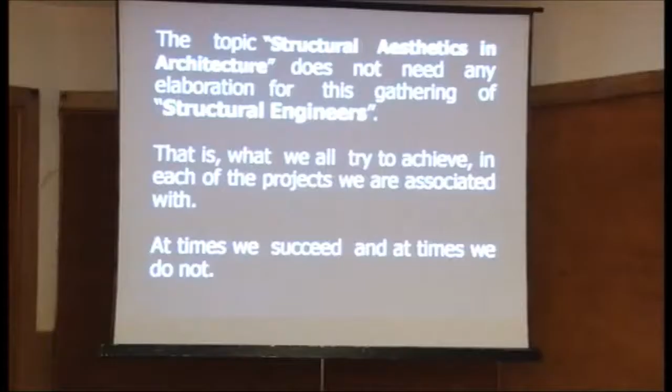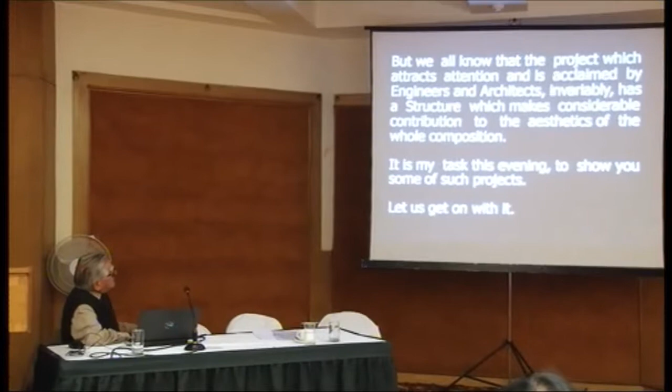The topic structural aesthetics in architecture does not need any elaboration for this gathering of structural engineers. That is what we all try to achieve in each of the projects we are associated with. At times we succeed, and at times we do not. But we all know that the project which attracts attention and acclaim by engineers and architects invariably has a structure which makes considerable contribution to the aesthetics of the whole composition.

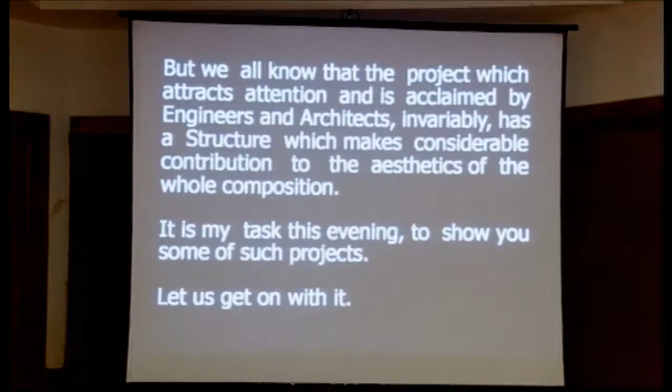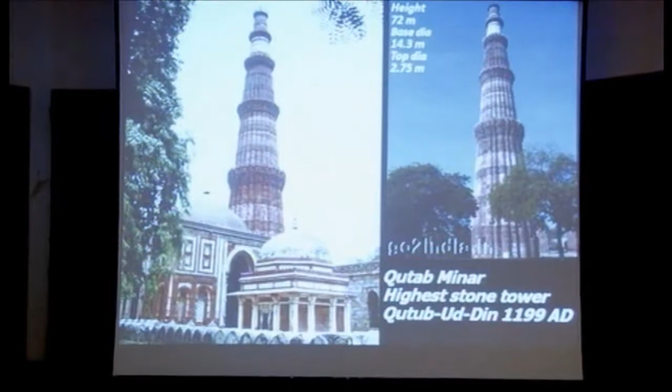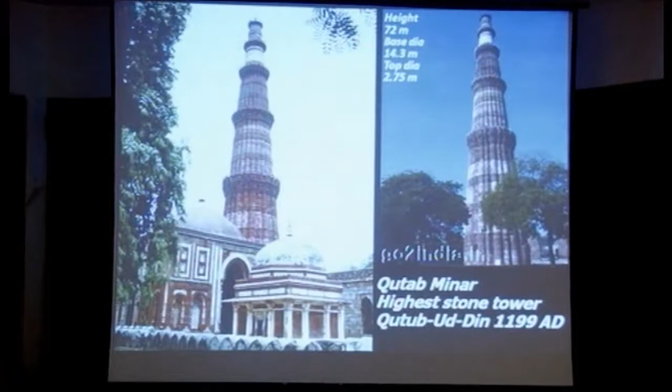Friends, it is my task this evening to show you some of such projects. So you all recognize these buildings, you've seen them all the time - what gives them their aesthetics? It's the structure which gives them their aesthetics. Qutab Minar is the structure which makes it so beautiful. Eiffel Tower is the structure which makes it outstanding, a symbol of France, if not Paris, and it's known all over who designed it, who built it - engineers.

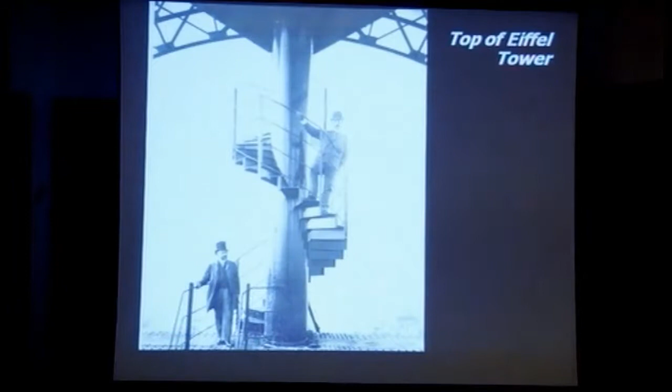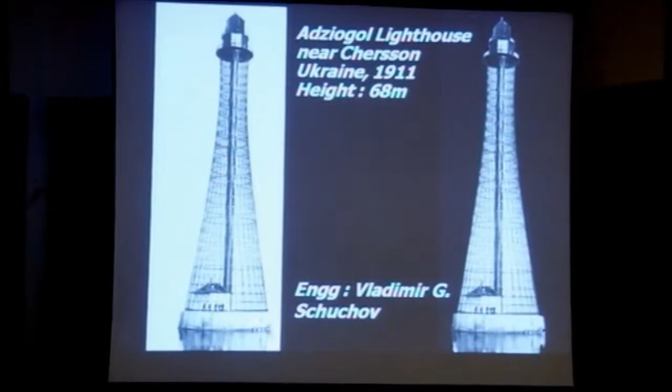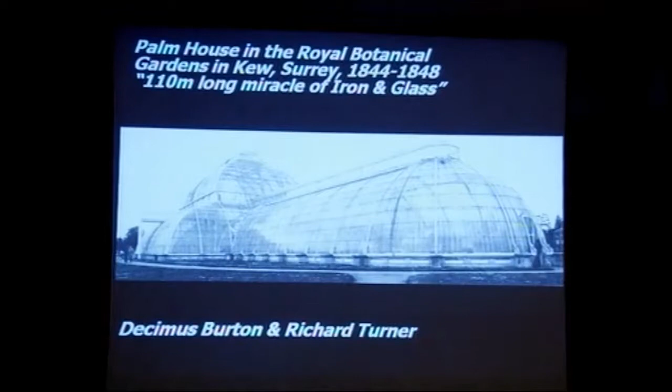These are the two gentlemen standing at the top, way back when no computers were there, no analysis was there, nobody knew so much about the properties, but look at these. This is another engineer who did it in Ukraine in 1911. These are very old buildings designed by engineers - this is the Royal Botanic Palm House Gardens in Kew, 1844-1848, 110 meters long, a miracle of iron and glass, it says. All done by engineers, with beautiful structures inside.

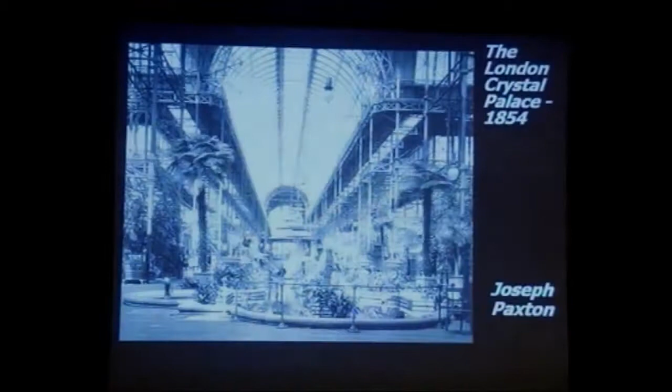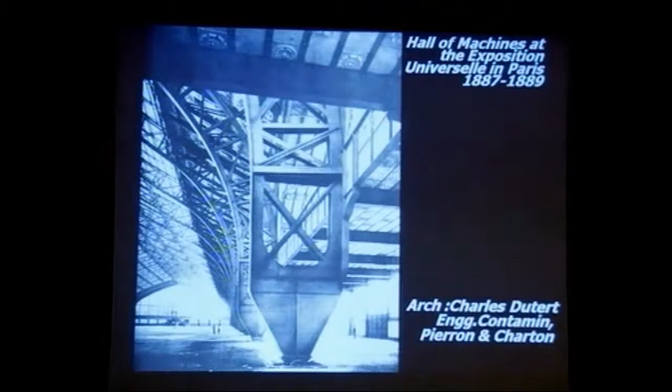Well, so I just wanted to set the mood. Now we will come to what my colleagues have sent me.

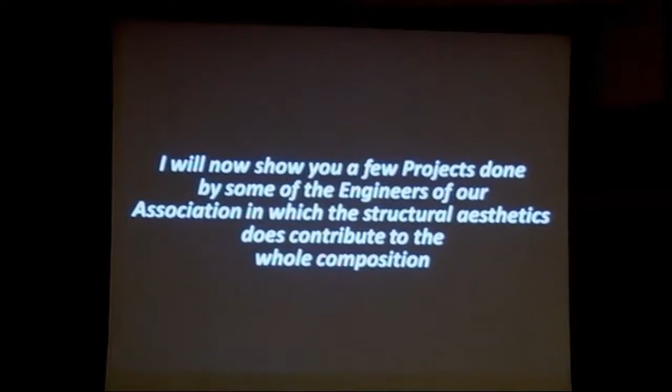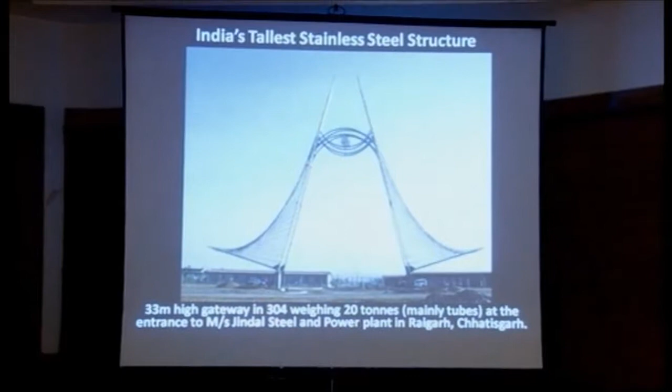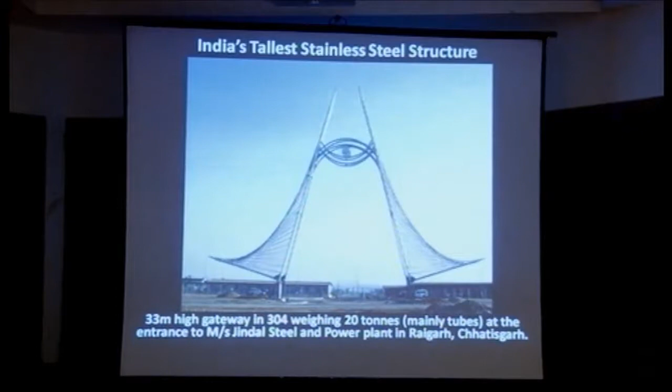I will like to start with the only lady member in this audience, amongst our association - her project. Look at this structure. This is the eye looking at all of you, trying to see what is inside your mind. This is a gateway structure, all in stainless steel. Isn't it beautiful? And the beauty is that it's all made of straight pipes - the curve you see is actually an illusion. These are some other views. She has stated something, but this is a beautiful structure. I thought it would be a nice befitting beginning.

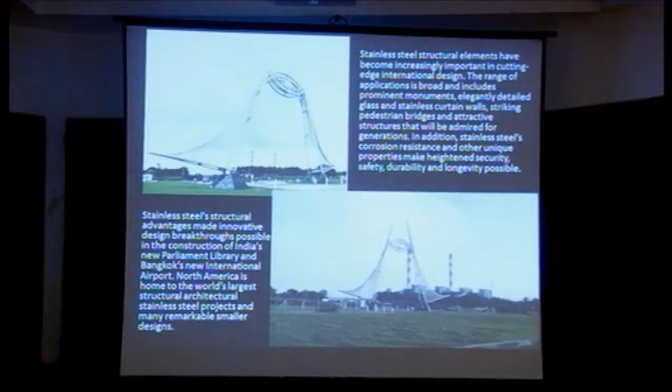And then we come to our president. I think he has made a presentation already, all of which you must have seen. It is in Calcutta, the terminal building. It has such a daring structure - 81 to 90 meter span trusses and 27 to 18 meter cantilevers on either side.

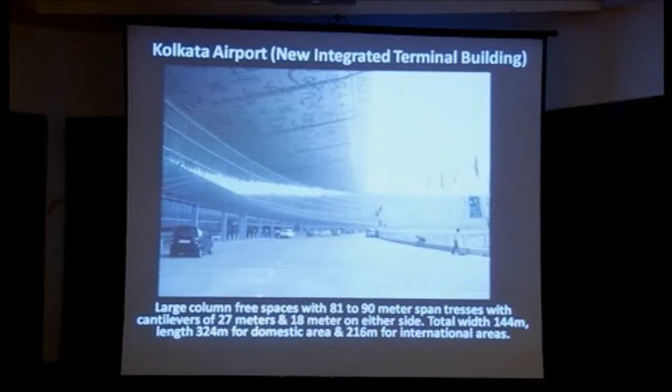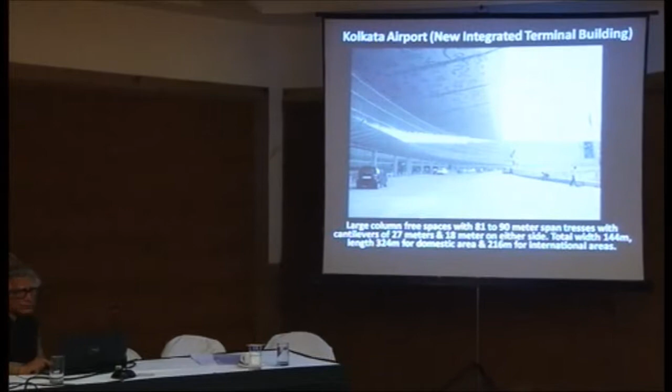And the total building is 144 meters by 550 meters - it's a huge building, and he has done it very successfully. It's a very bold structure. This is the interior of it, and you can see a cross section. It has two basements, but the truss has huge cantilevers.

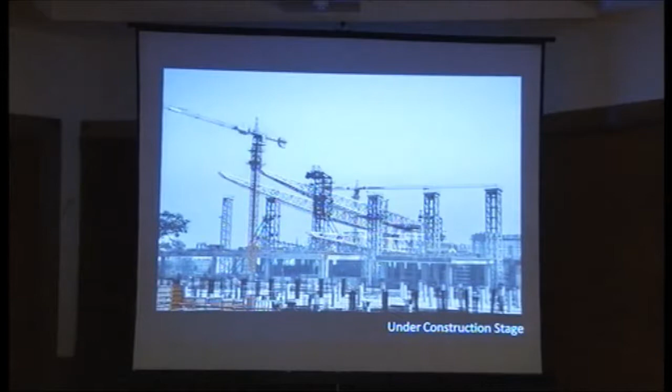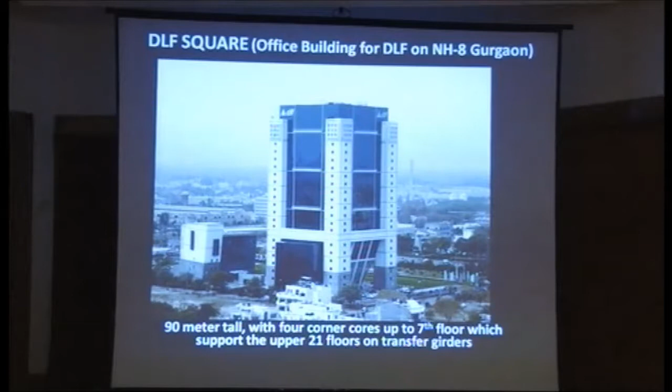And this is some of the construction slides - the construction itself was a task by itself, but it was carried out very successfully. And this is another building you have all seen, but perhaps you didn't know that the lower band is transfer girders, and it carries all the upper floors. And these four hollow cores carry the entire building. It's quite an interesting structure.

And this is another beautiful building which he has done in Amritsar. It has 3 basements and 8 floors, and a whole lot of bridges connecting 3-4 floors, 30 meter span bridges. And there is a banquet hall inside which has transfer girders to carry the upper 6 floors, and all the PT slabs and whatnot.

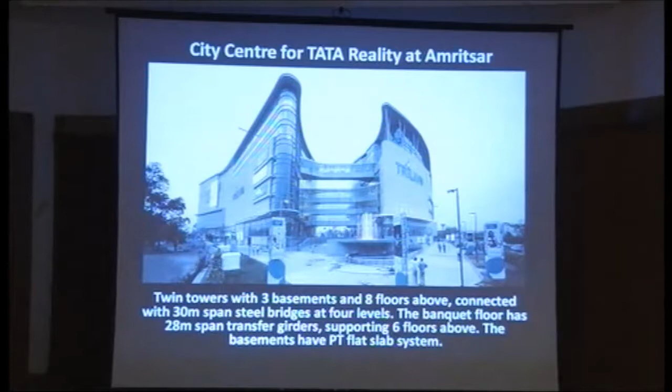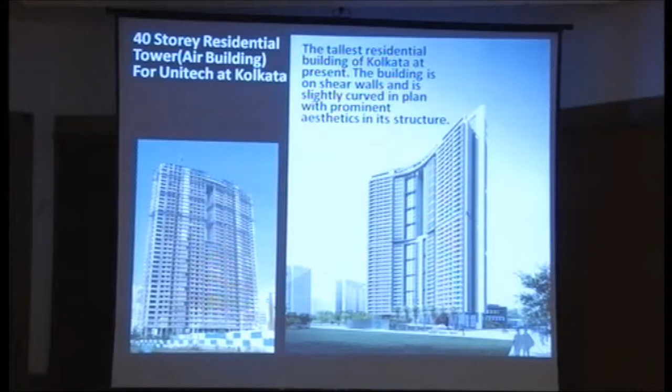And this is the first tall building in Calcutta - 40 stories, a residential building. So far it is the tallest. It's a beautiful structure which I think for many years will stay the tallest, because it's quite surprising that in Calcutta they went vertically so much.

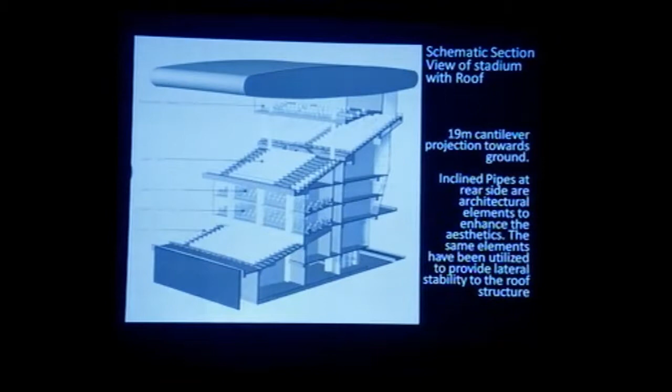Now I'll quickly show you the various members' structures. You see, this is Eden Gardens Stadium - that is a cross section. I don't think I have to give all the details, perhaps real images are enough. Do you all agree? Yes. So it's a large cantilever with 2 or 3 tiers.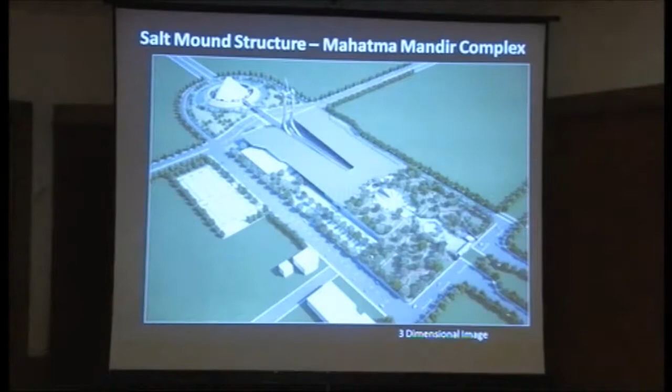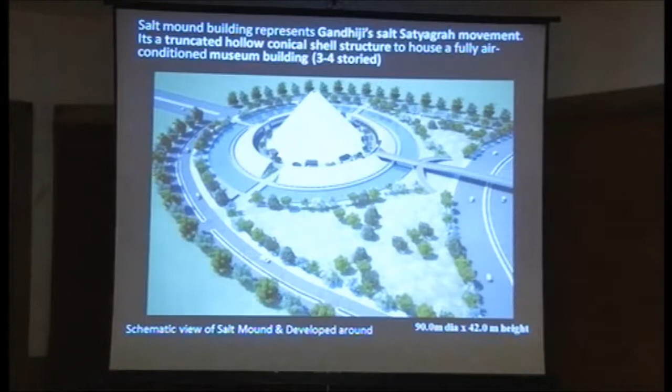To commemorate Mahatma Gandhi's Salt Satyagraha, they thought of this conical structure which houses a museum inside. The dimensions are given there - 90 meter span and 42 meter height. It is in concrete, shown during construction. It's quite interesting.

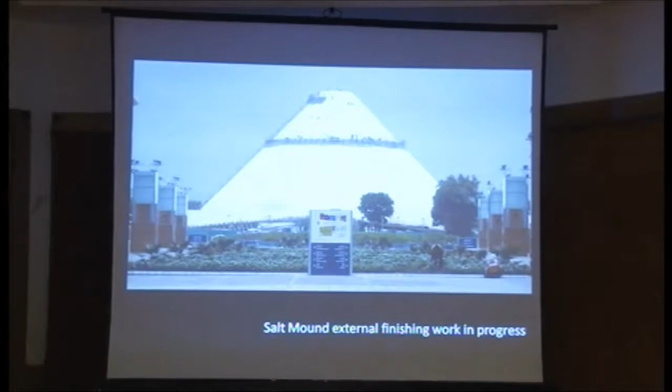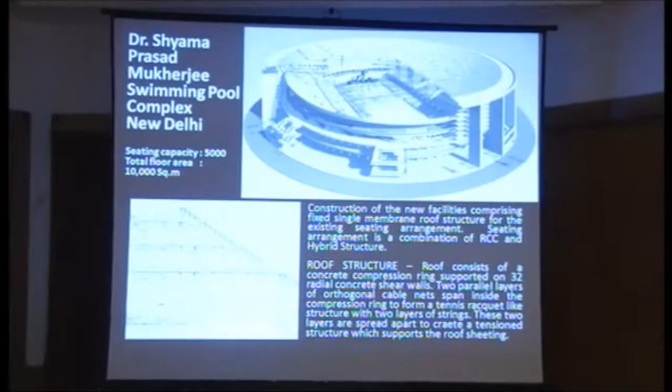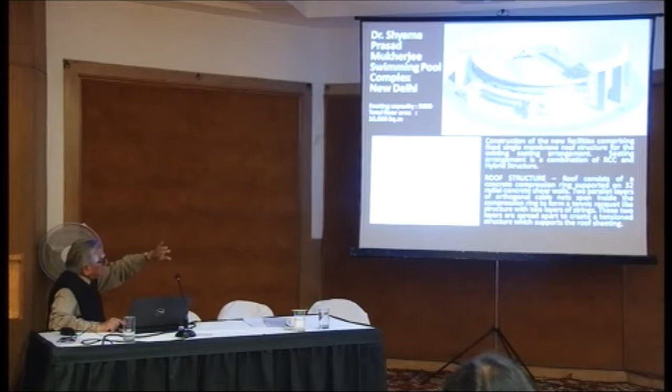Now this is the Shyama Prasad Mukherjee swimming complex. The swimming pool was already there, but they had to cover it, and they covered it in a very ingenious manner - they had shear walls all around, and a ring which supported two meshes, creating a tension structure, with the ring as a compression member. It's a beautiful structure.

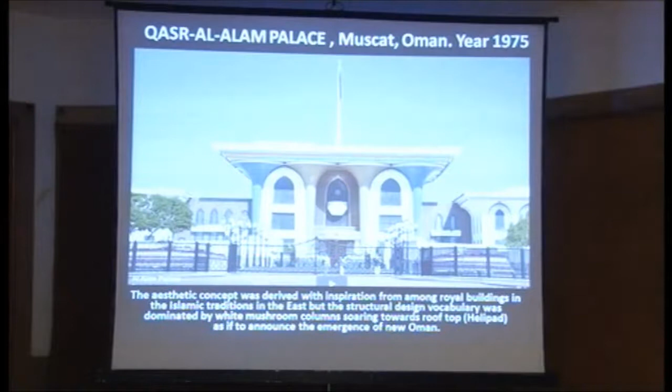Then Mahesh—I'm glad you've come finally, Mahesh. Yes, I've been outside keeping other people company. But you haven't brought Ranjana along, I was expecting her also to come.

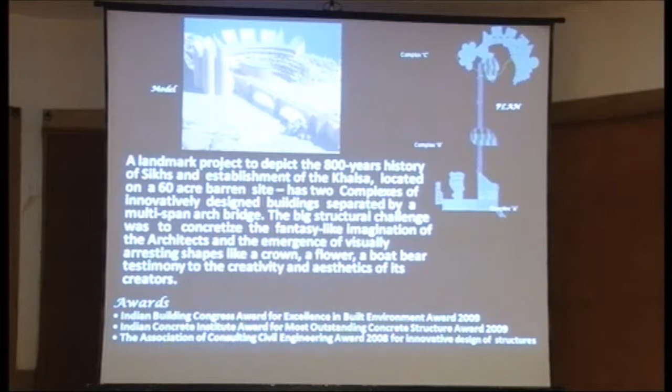Now the next slide gives the description. That side is the plan. There are two units and a bridge connecting them.

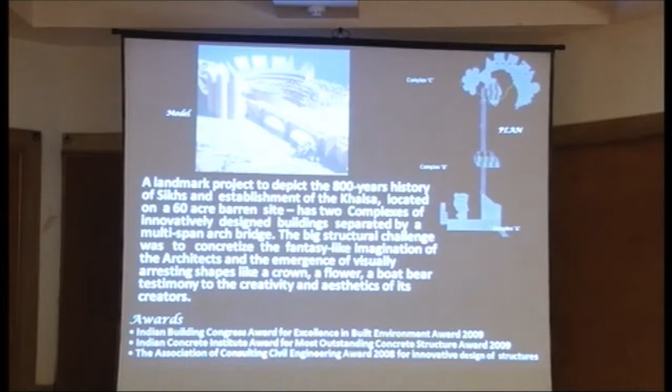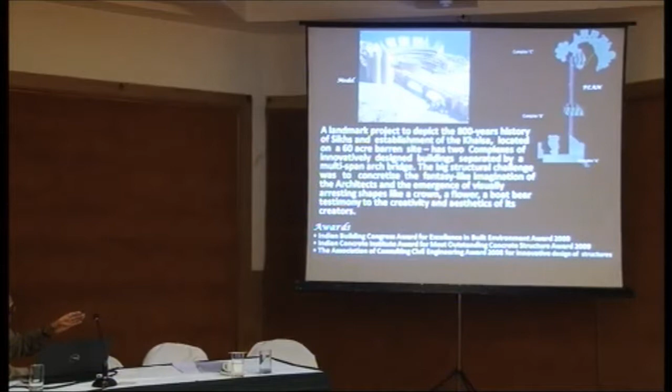It's interesting to read this, so I'll read it quickly. A landmark project depicting the 800-year history of Sikhs and the establishment of the Khalsa, located on a 60-acre barren site, with two complexes of innovatively designed buildings separated by a multi-span arch bridge. You could see all that. The big structural challenge was to concretize the fantasy-like imagination of arresting shapes—a crown, a flower, a boat—testimony to the creativity and aesthetics of the creators. It has won so many awards: Indian Building Congress, Indian Concrete Institute, and Association of Consulting Civil Engineers.

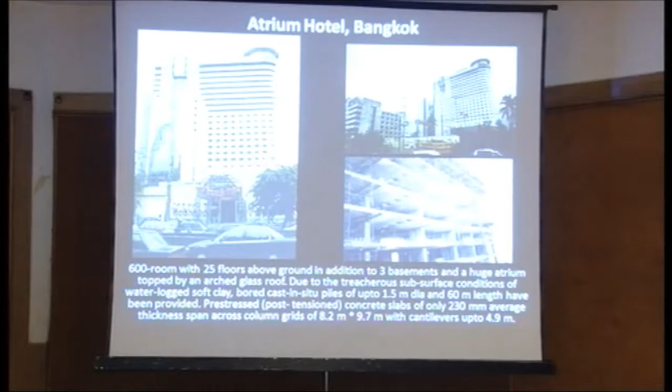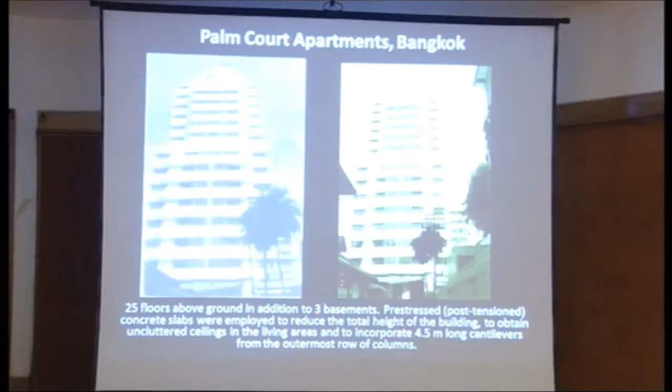He has also done these multi-story buildings in Bangkok, beautiful buildings with these slabs and large diameter piles, 60-meter long piles. These are very challenging structures, and the structural contribution is what makes these buildings possible—you can see how the structure plays such an important part.

Now this is from Shirish Patel, that's Dr. Nori, who has sent this. Anybody who goes to Bombay doesn't miss this building—the Kanchanjunga Apartments, 1974. I was told that from India there was an international exhibition of concrete structures, and they selected two buildings from India. This was one, and the other was the Hall of Nations, which I'll show you later.

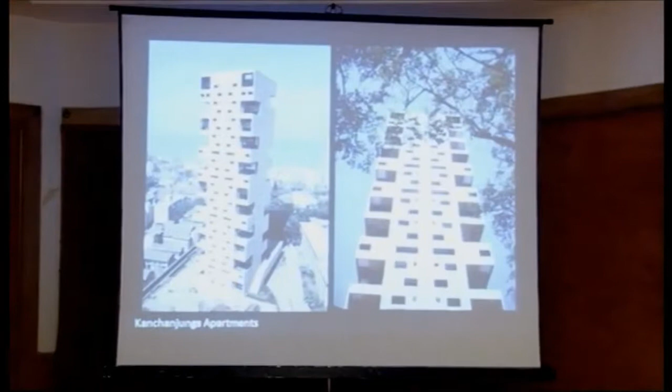This is a building from '74 with shear walls, and it's beautiful—you don't have to read it. It's all built around a central core; photographs show the core was slip-formed, and the building came up later. These are other views—a beautiful building.

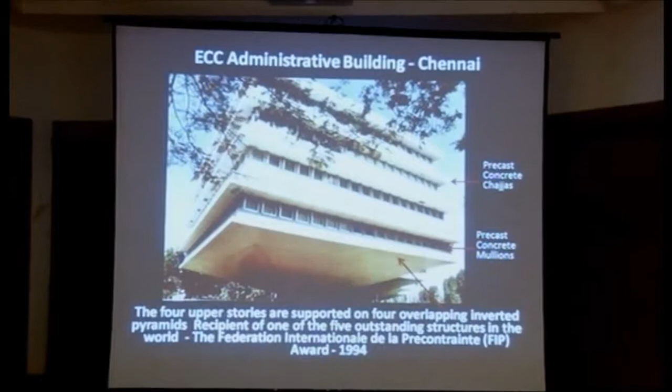This is another award-winning building by Shirish's office, Dr. Nori. The entire structure is built on a core—a lift core, where the bottom is a post-tension slab and the top wall is supported on this. It's beautiful.

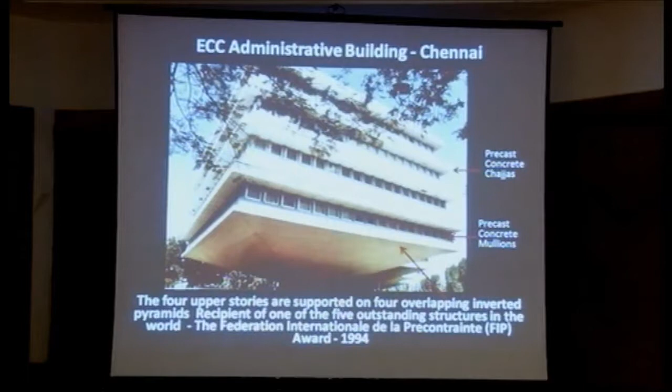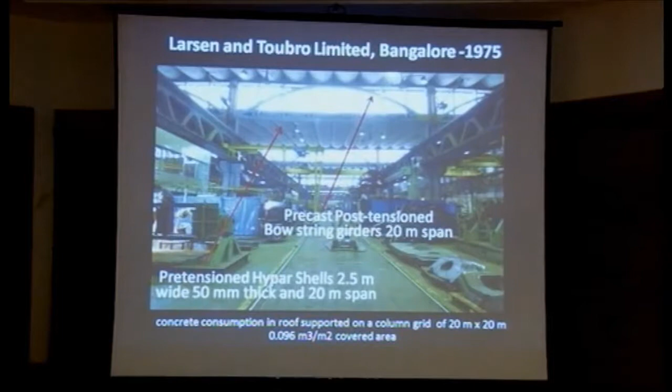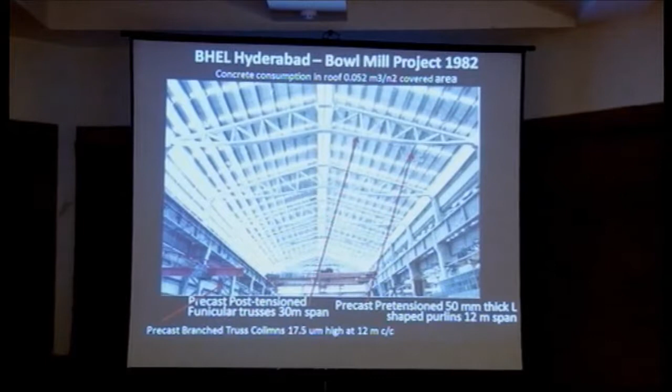This is another very large span factory with a 20 meter by 20 meter grid. Shirish's office has done a lot of construction in precast concrete, so this is all precast, with purlins 50 mm thick spanning 20 meters, and these are hypar shells. Here also there are trusses with 30 meter spans, and purlins and very heavy gantries and so on.

Then we have Maple. Is Maple here? I was expecting this building would come, I was expecting you would show this building. But whosoever has sent their buildings, they are being shown. Who has not sent, has not sent.

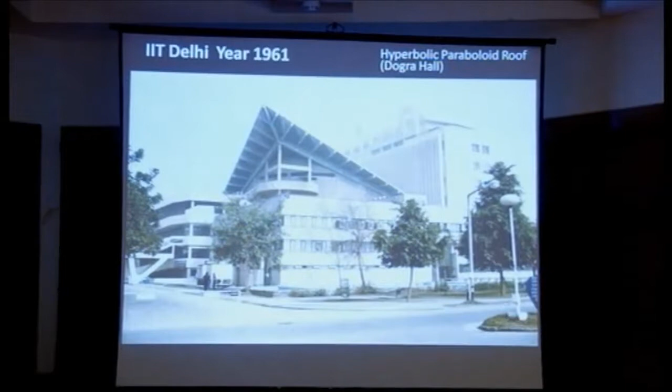So Maple, now everybody has seen this in IIT, this Dogra Hall, which is 120 feet by 80 feet. It was built way back in 1961. It was designed as a stiffened hyperbolic paraboloid. The beauty of it is all the timber used to erect it was later used to make furniture, etc.

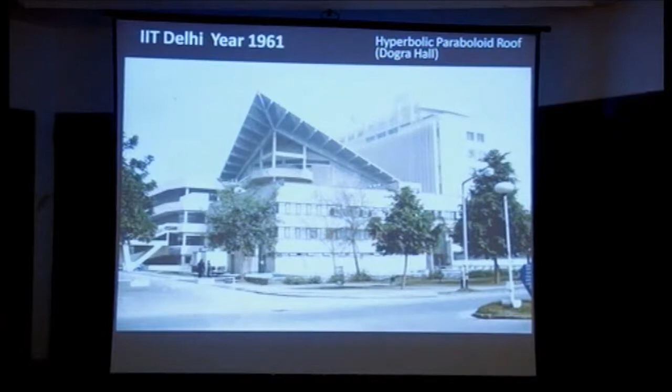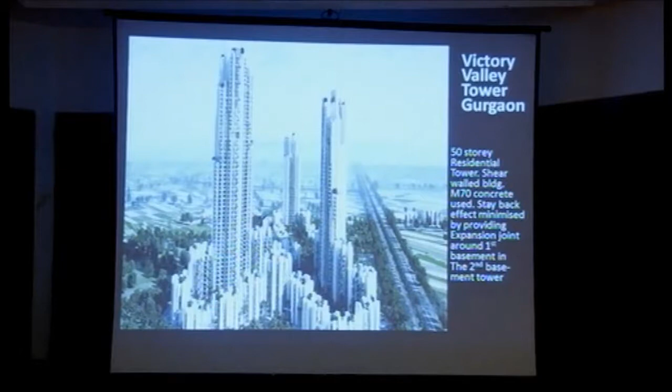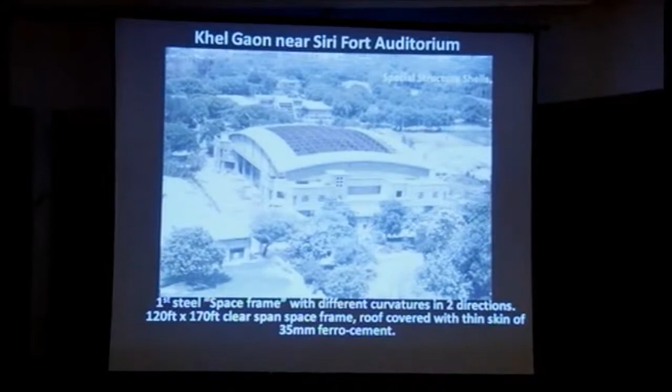This is another very interesting space frame which he has done with concrete, supported on a peripheral concrete wall, and inside is double curvature, all in steel, double layer.

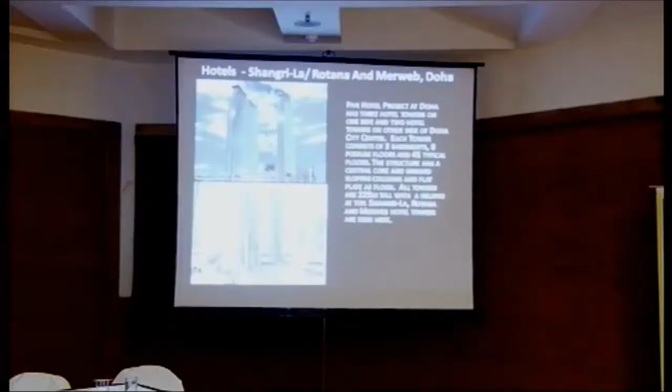And these are hotels which he has done in Doha: the Hotel Shangri-La, Rotana, and Merweb. These are all very tall structures, and they make their presence felt wherever they are. You can see them.

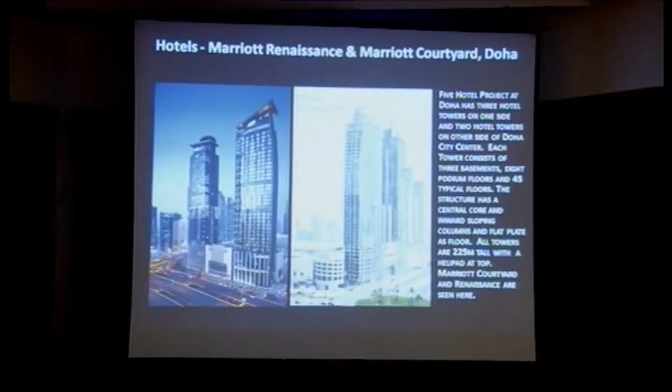This is another, again in Doha, 2 more hotels, the Hotel Marriott and Renaissance etc. He has given all these very tall and beautiful structures using various techniques. The technique used to equalize the column shortening etc. is given there. Anybody interested in more details can get them.

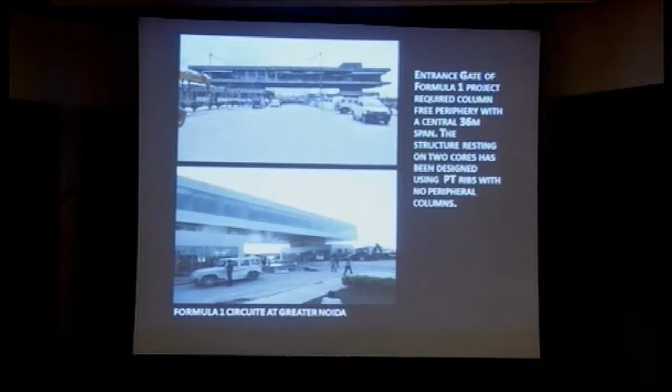Now this is the Formula 1 building which he has done. It has large cantilevers, large spans, and pre-stressed concrete slabs etc. So you see on the left hand side, the cantilever structure.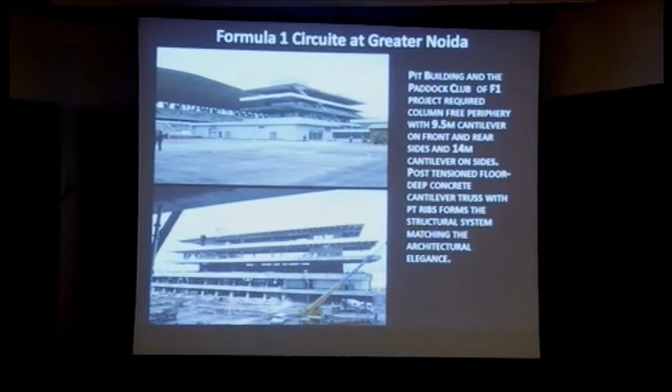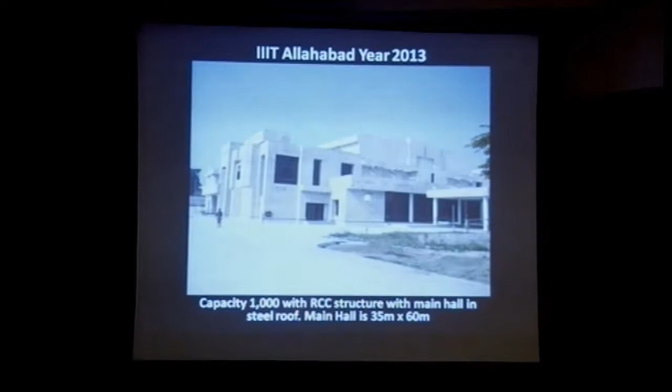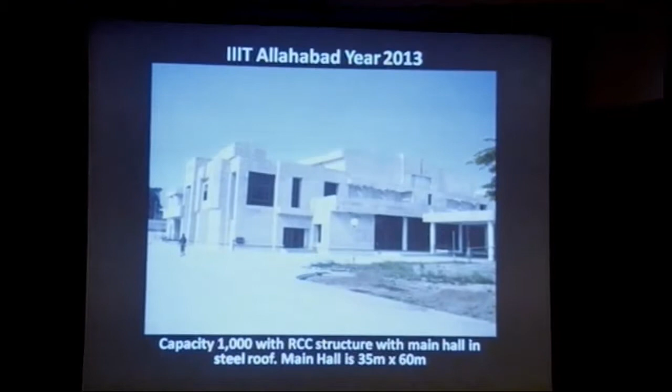Manoj is here. So Manoj's building, you see this beautiful building with very elegant lines and spaces, and inside there is a big hall which is all hidden because the architect hid it. It's 35 meters by 60 meters inside, a beautiful, peaceful building, very delicate looking.

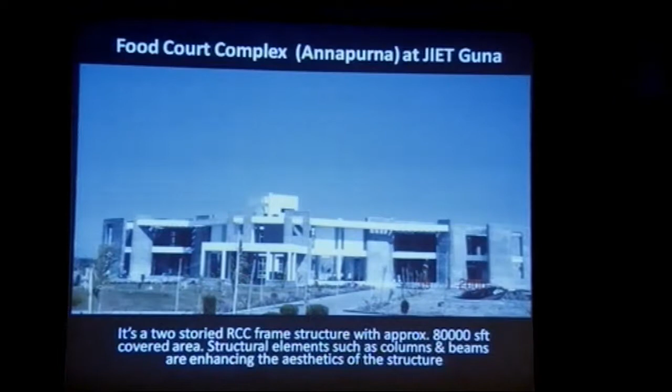And this is another one. This building also has strange qualities, using brick and concrete in a beautiful manner. It's a food court complex, Annapurna. You see the use of brick and concrete columns, and stone, used in a very delicate manner.

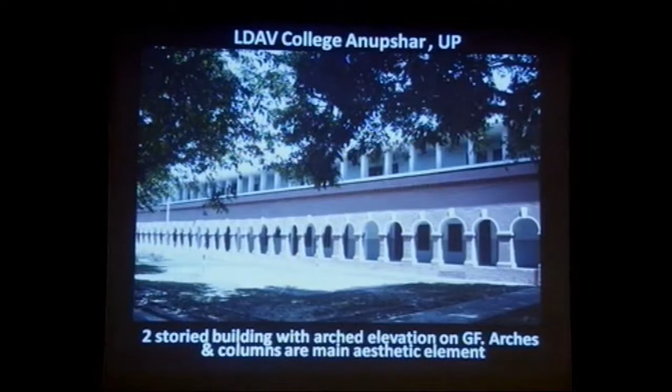This is very interesting, he's picked up the old medium, the arch, which you must have seen everywhere, but used it in a new building complex and it looks very elegant. The arches down below and columns above. Very, very nice buildings.

Then, I don't think he's here. No, it is from outside. You see, he has done this gateway complex in Mundra.

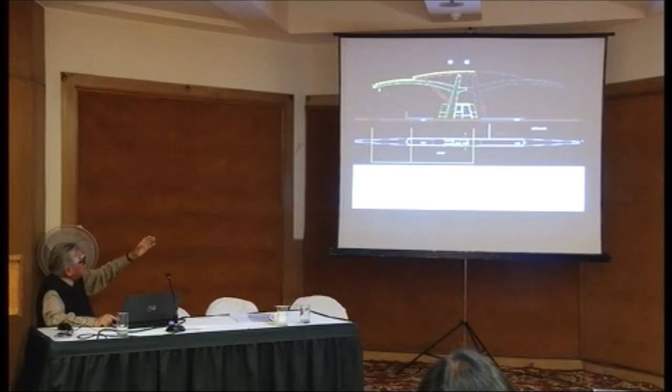This has cantilever structures, double cantilever and single cantilever, the gateway. He sent me a sheet of all the drawings, so I had a hard time selecting some to give an idea of what he's trying to say. This is the gateway, and these are the cantilevers, the slanting columns. Because that area has cyclones and strong winds, it was a big challenge for him to create these cantilevers and stabilize them. These are during construction - single and double cantilevers, large cantilevers with inclined columns.